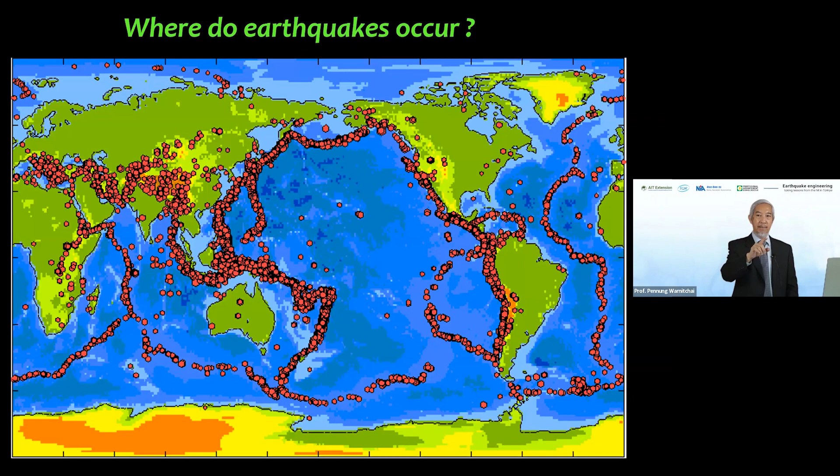So by this mechanism, most earthquakes happen near to or at the boundary. If you look at this slide and go back to the previous one, you can see that most of the earthquakes happen at the boundary or near to the boundary.

Now we come back to the tectonic plate map again. Let's zoom in on a particular area. For example, in Thailand, the picture on the left shows the tectonic map. You can see Thailand, Malaysia, Myanmar, Laos, China are all located in one plate, and India is on the other plate. The plate of India is moving toward our plate at a speed of around 65 millimeters per year. The rate of movement is very slow; if you watch them move, you cannot see that they are moving, but they are moving. The boundary between them is partly in the Andaman Sea, under the Andaman Sea. On the right-hand side, you can see the distribution of earthquakes, concentrated along this boundary between these two plates.

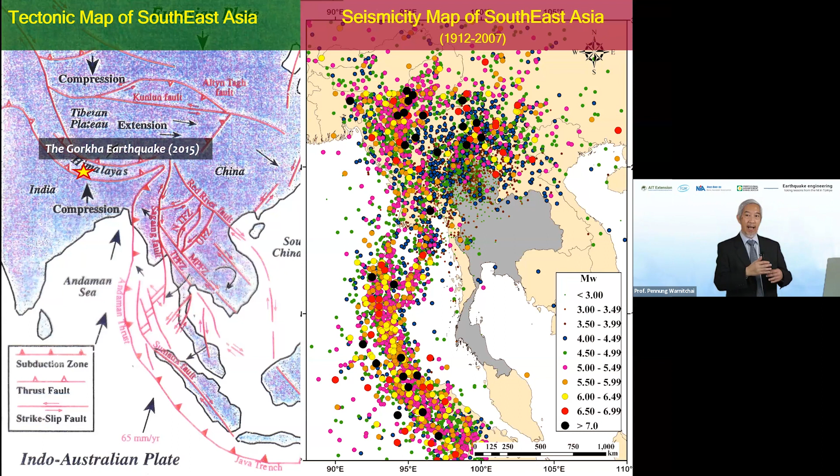The boundary between these two plates also continues to the north. You can see the Himalaya mountain range; actually the Himalaya mountains are also created by tectonic action. Recently in Nepal, a large earthquake happened, called the Gorkha earthquake in 2015. This also happened at the boundary between these two plates. Now let's move to another area.

This is Turkey, some people call it Türkiye, but let me call it Turkey. This country is located in a very complex tectonic condition. We have a Eurasian plate in the north, Anatolian plate, and we have Arabian plate in the south. And these plates are moving in different directions.

The boundary between the Eurasian and Anatolian plate is an active fault called the North Anatolian Fault. That fault shows the boundary between these two big plates, with a relative movement between them at a rate of around 18 millimeters per year. The higher the rate, the more earthquake activity.

The boundary between the Anatolian plate and Arabian plate is the East Anatolian fault, with a rate of movement around 8 millimeters per year. So these are two very large active faults in this zone. You can expect that there will be many earthquakes happening close to this fault or on this fault.

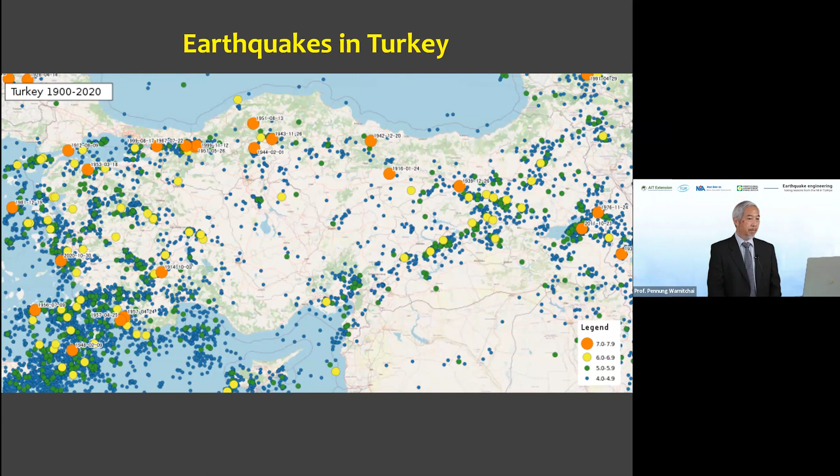You can see in the north, the zone along the North Anatolian Fault, very high. And in the south, you have the East Anatolian Fault. So these are the zones that they already expect large ground shaking intensity. They already expect damaging earthquakes to happen along this zone.

And then this year, February 2023, they had a big earthquake, the Turkey-Syria earthquake. The location is along a portion of the East Anatolian Fault. If you go back to the previous slide, it is actually this area, the area that they already expected this to happen.

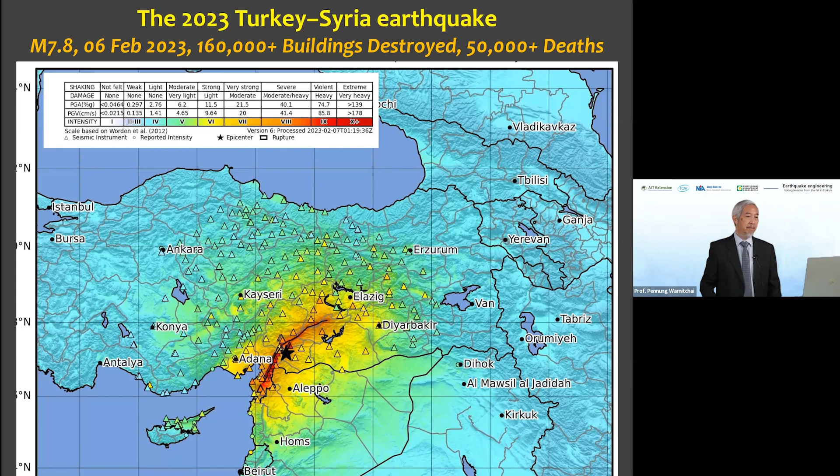Let me show you some video clips in the same area. A single large earthquake.

Now, this earthquake came without warning. We cannot give an early warning for earthquake type disasters. We cannot predict when it will happen, where it will happen. We cannot predict it. So the best strategy to handle this risk, to mitigate the risk, is to make sure that our buildings are strong enough to stand against earthquakes.

To do that, we need to design and construct our buildings for earthquake resistance. But there are many explanations why we see a large number of damaged buildings and a large number of casualties. The first explanation is that a large number of buildings were built before modern earthquake-resistant building design standards were introduced in Turkey. That's one of the explanations we have.

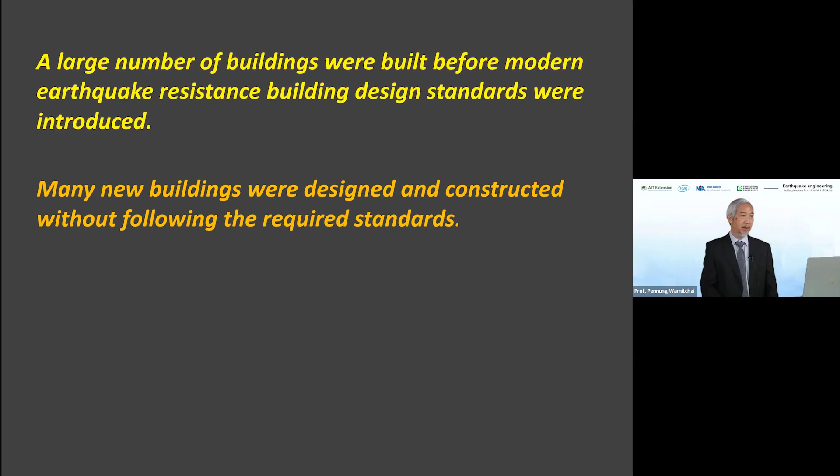And the third one, I think, is also quite important. The intensity of ground shaking was higher, much higher than the level expected in the standard. In the standard, we assume some level of maximum ground shaking. But for this case, the ground shaking turned out to be stronger than what was assumed in the standard.

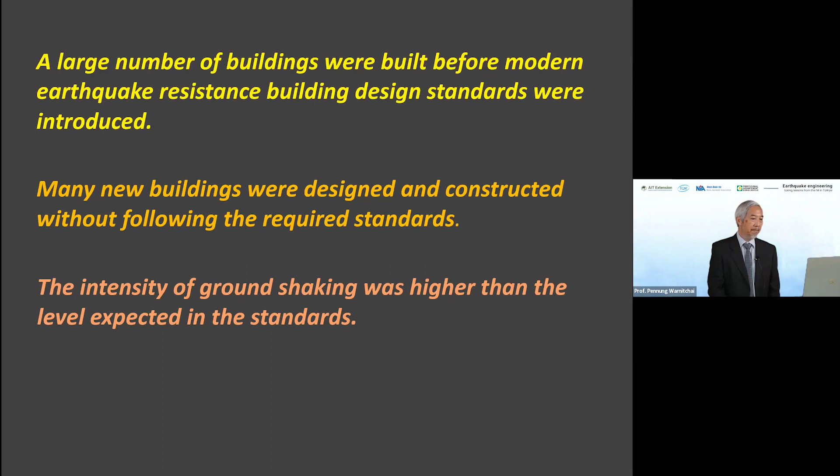Let me show you some information. This is a bit technical, but I hope you will understand. The pictures below show the location of seismic instruments in the area affected by this earthquake, and they have recorded many ground motions. They have many ground acceleration records available from all these seismic instruments, and they use that to calculate what will be the maximum earthquake-induced force in the building.

This is a lateral force produced by the earthquake in the building, shown in the upper figure. The vertical axis shows the level of maximum earthquake-induced force, but this force depends on many properties of the building. The key property is the natural period of the building, so this plots the force against the natural period of the building.

Let me give you some rough idea. 0.5 means 0.5 second natural period, related to a building of about 5 stories. 1.0 second means a building of about 10 stories, and I think you can continue from there.

Now, the standard is given by 3 curves, the red, the blue, the green, for different soil conditions. All these curves show the level of earthquake-induced force in the building expected in the standard, based on the 500-year earthquake that may happen only once in 500 years. But the ground motions we recorded, when we compute the level of earthquake-induced force, many of them are much higher than the standard design curve. You can see many of them exceed this level.

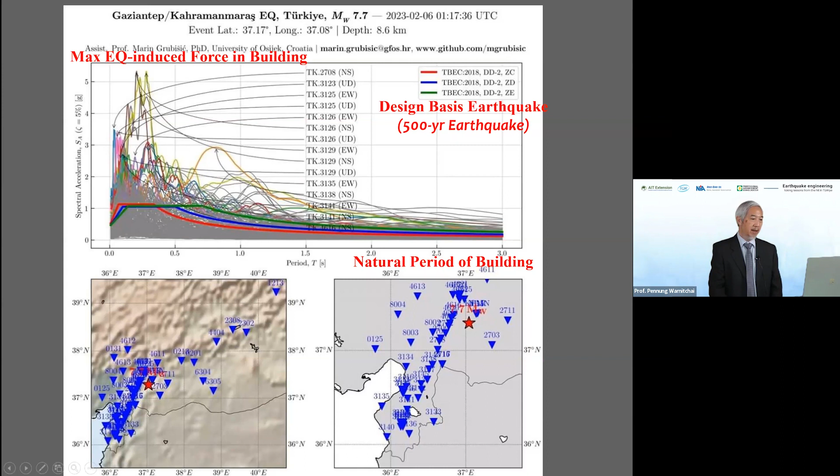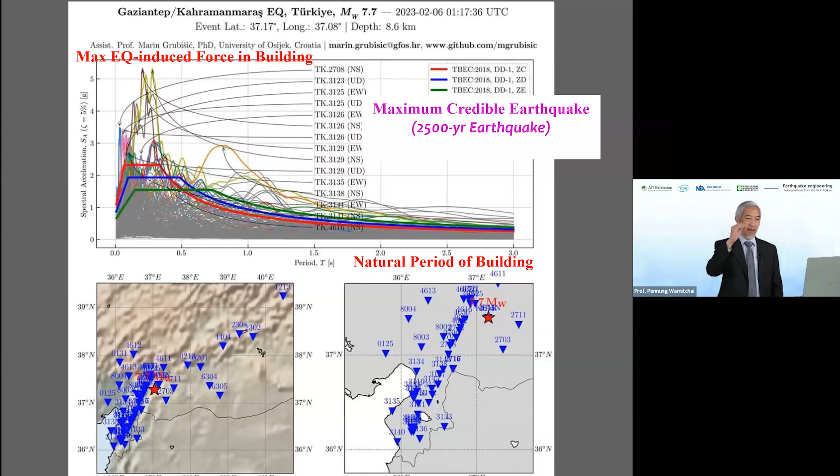So we have 3 issues. We have old buildings that are not following the new standard, and new buildings that also are not following the standard. And also the standard is not based on a level high enough to cover all these cases.

Based on this, we can then know our target. We will know what is the maximum level of ground shaking that might occur in our country, and then you can prepare yourself for that level.

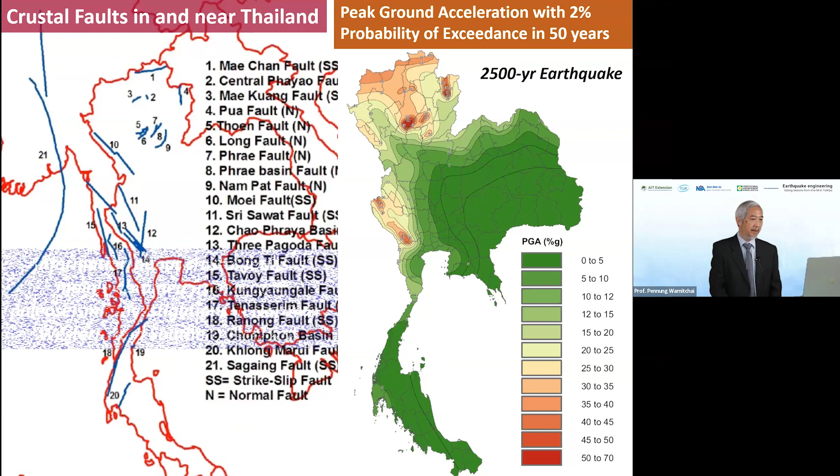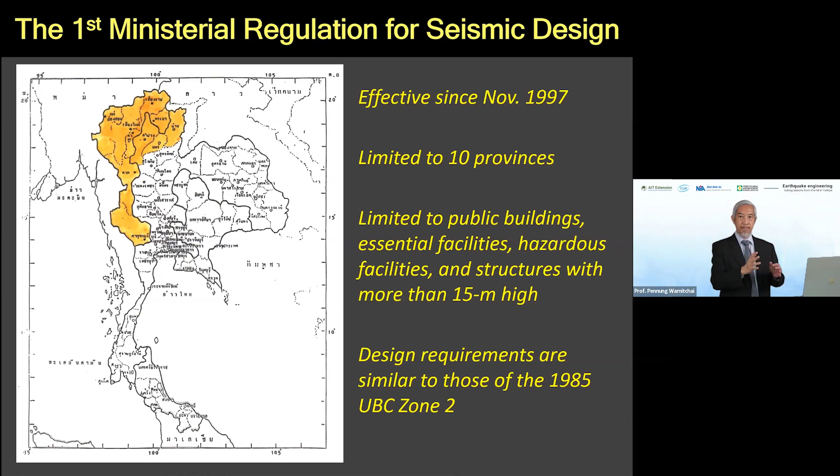And after that, around 10 years later, we introduced the guideline, or design standard. We need to have a regulation to make sure that people will follow and design buildings for earthquakes, and we need to have a standard for engineers and architects to make a proper design and construction of buildings and structures. So for the case of Thailand, we introduced the regulation first, and then followed with the national standard to guide engineers in designing buildings against earthquakes.

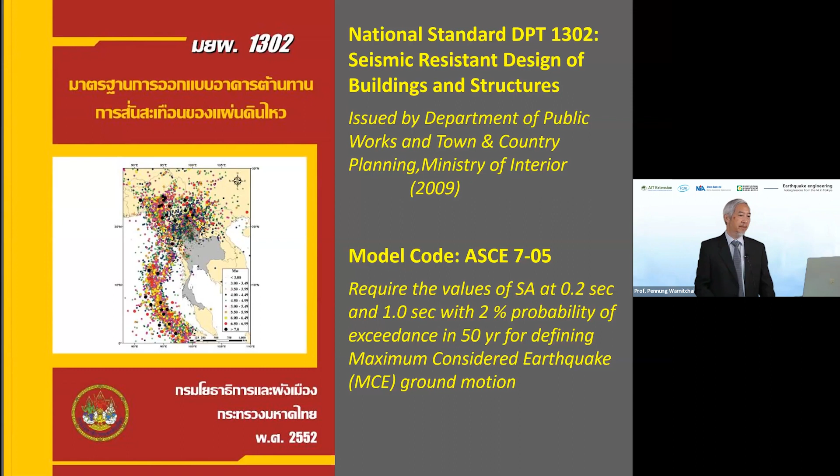Now, after talking a lot about the need for earthquake resistant design, let me give you some rough idea of what engineers need to do to make sure buildings can stand against earthquakes. First, we need to make sure it has some lateral strength. Lateral strength means ability to stand against lateral force.

When an earthquake shakes your building, it produces additional force, both in the vertical direction and also the lateral direction. Your building already has some ability to carry vertical load, because most buildings are designed for gravity load, dead load, and live load, so it has some additional strength for additional vertical load. But most buildings normally are not designed for lateral effect.

So we need to have some lateral strength. In the code, in the standard, there will be several formulas and detailed guides on how to design this.

The second point is we need to make sure the building has some lateral deformability. Some people call this ductility. It means that under the effect of an earthquake, the building will sway left and right in a cyclic manner. This may create damage to some components, columns, beams. We have to make sure that after several cyclic responses, the building will be able to stand and continue to carry the gravity load.

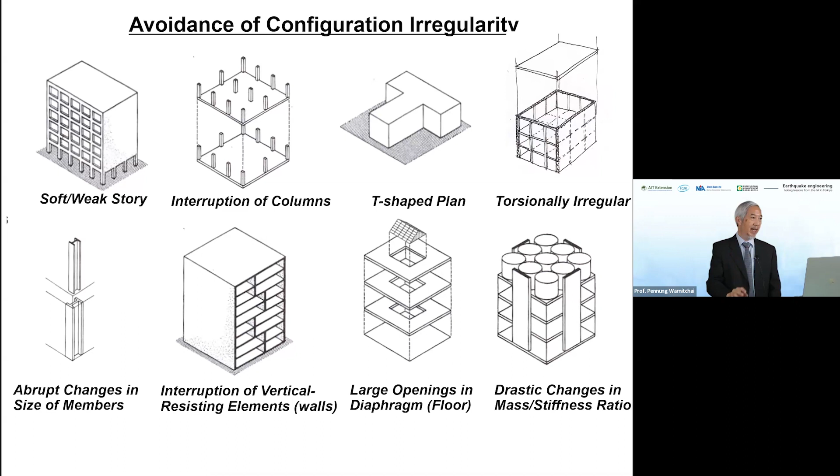Nowadays, many modern constructions - our houses, offices, buildings - use concrete material. Concrete is a strong material, but it's quite brittle, it cannot deform well. So we normally put steel bar inside the concrete, making it a reinforced concrete structure - concrete with steel reinforcement inside. But whether it will deform well or not depends on how you arrange the steel reinforcement inside your concrete structure.

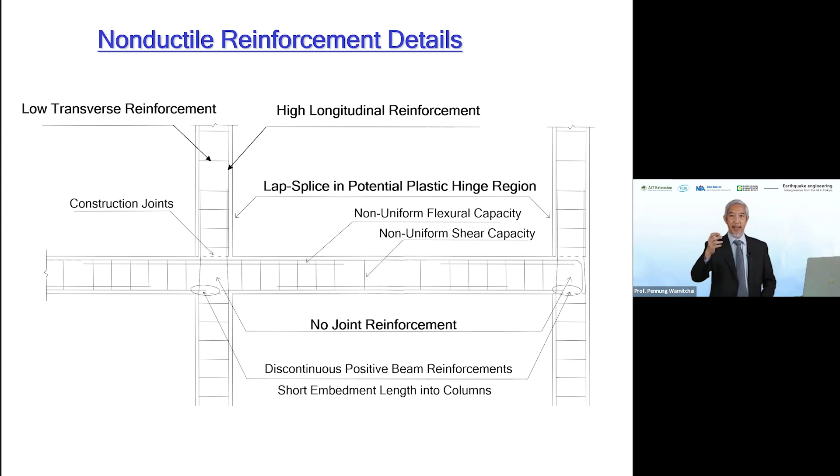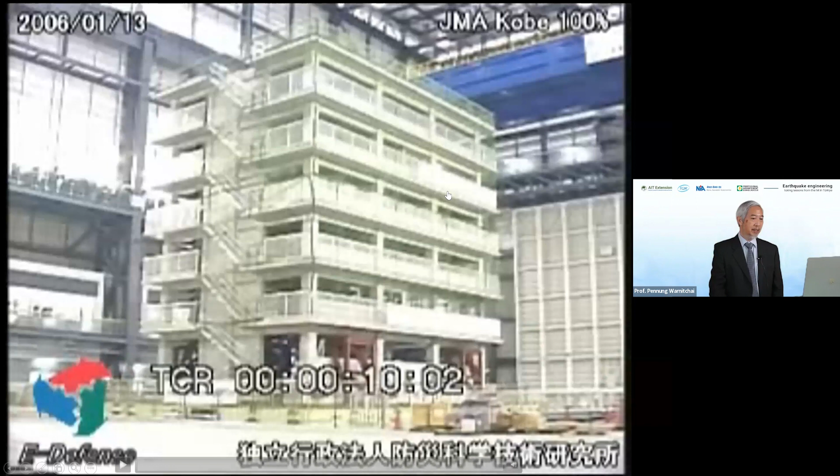I can show you some examples. This is an experiment conducted in Japan - a full-scale building put on a large shaking table. Japan actually invests a lot in earthquake research, so we can learn from that.

I'm freezing the video now. You don't have to be an engineer - you can tell that this column cannot carry any more load. It's completely destroyed by a brittle type of failure we call shear failure. So it cannot carry any more gravity load, the gravity load that transfers from the top floor down to this floor.

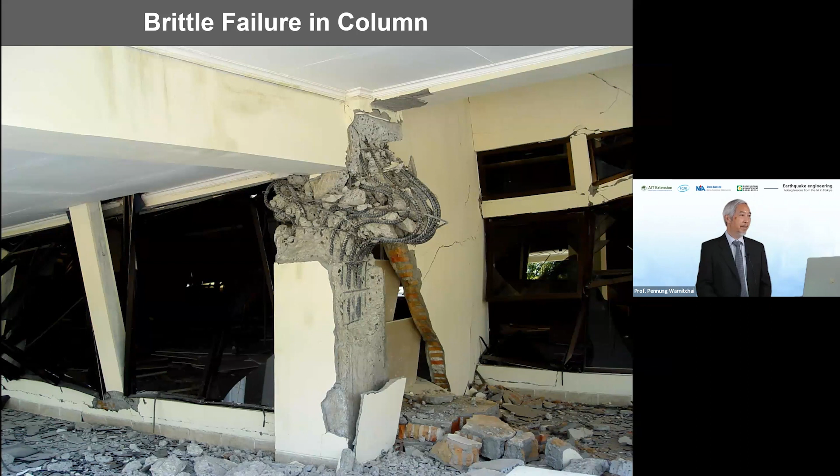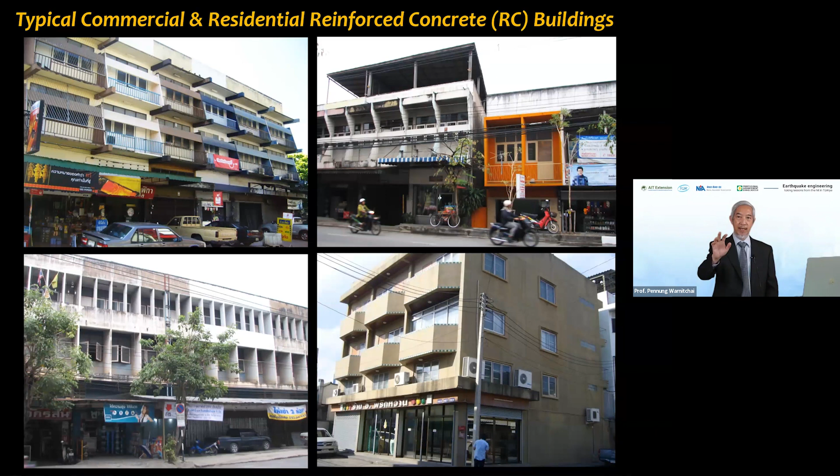Now that you know something about earthquake resistant design, let me give you an example of a real building. This is a typical commercial residential building - we have a lot of these buildings in Thailand, and I think you have them in Nepal, Singapore, and many other countries. They actually have many features that make them vulnerable to earthquake shaking. Most of these buildings are not designed for earthquake. The first story is for business and commercial purposes, the upper stories are for residential purposes. So if you take one sample of this building, you will see the structure like this.

The white part shows columns and beams forming a frame. The orange panel is the wall, made from brick. The brick wall is not a structural component, but it can strengthen and stiffen the structure.

We normally have many partition walls, exterior and interior, on the upper stories because they're for residential purposes. But for the first story, you don't have a wall in the front facing the street, though you may have walls on the side and back.

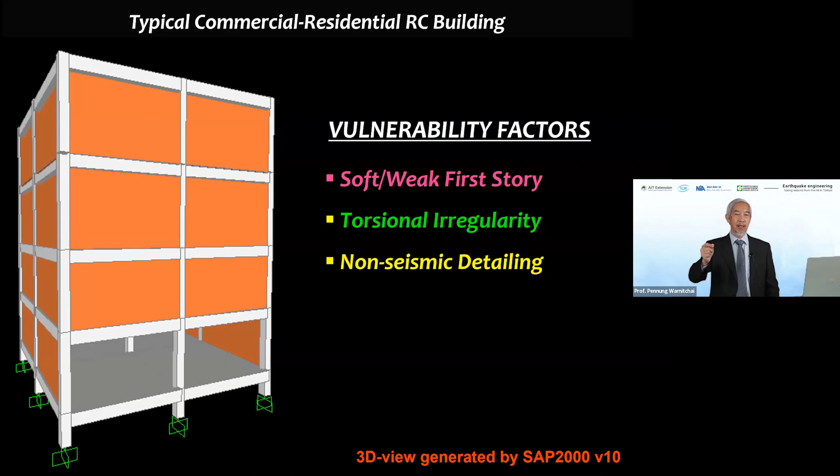This makes the first story relatively weaker and softer compared to the upper story, so we have a soft and weak story. The arrangement of walls—none in front but walls on the other three sides—makes it torsionally irregular. We also don't put reinforcement in the columns and beams in the right way, so it's not ductile. It's non-seismic detailing.

So when subject to earthquake, the building will deform like this. The upper floor looks quite rigid because of the many partition walls strengthening it, but the deformation concentrates only in the first story. Actually, it concentrates in the front row of the building, because we have walls in the back and on the sides.

So in the whole structure, the only critical components are the first story columns in the front row. All the deformation concentrates in these columns. So you can expect, when subject to earthquake, which component will fail first? It will be the first story column in the front row.

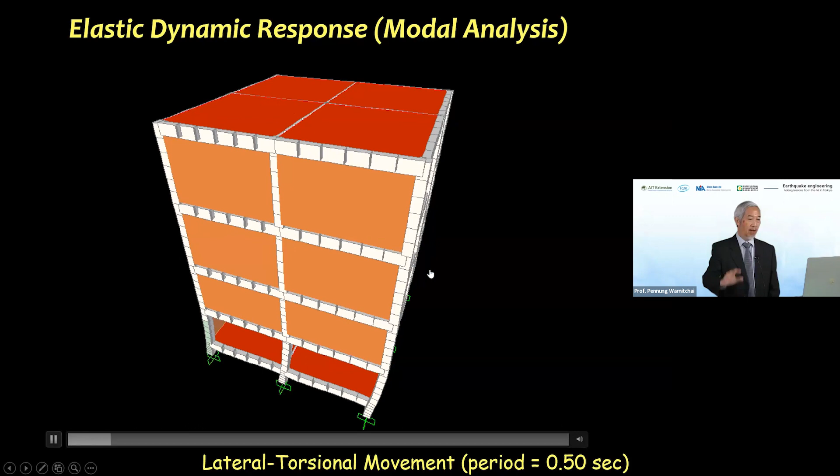The earthquake happened in the nighttime. Those who survived are those who slept on the upper floor. So please do not sleep on the first floor if you are inside this type of building.

This is a second example, from Nepal, Sitapila area in Kathmandu. I took this when I visited the area after the Gorkha earthquake. What you see here is the second story—the first story already collapsed.

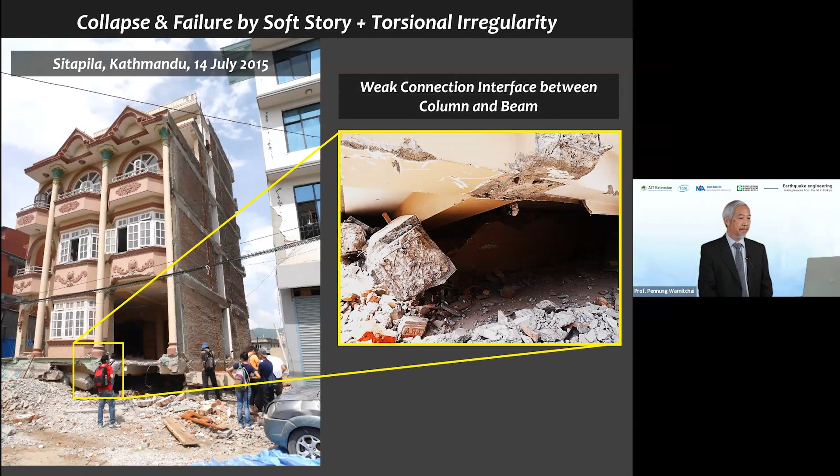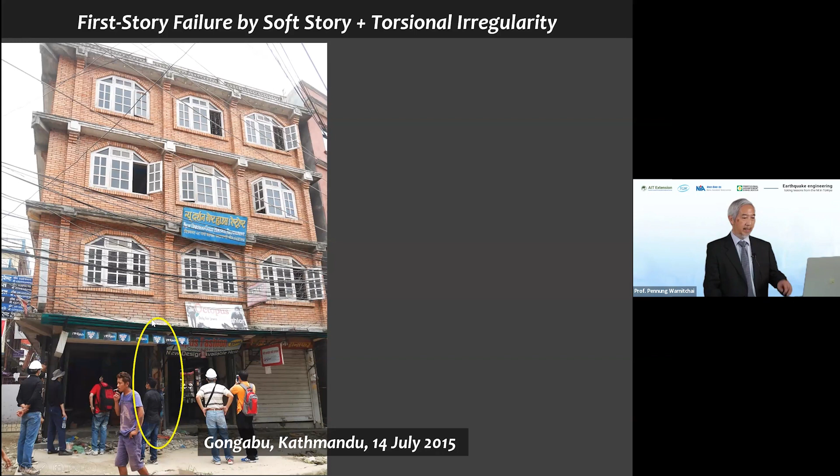Here is another example: a 4-story commercial residential building. The upper floor looks okay, the window is still in good condition, not much damage. But if you take a look at this particular column in the first story, you can see that it is completely in bad shape—already crushed, broken down. I still don't understand why it's still standing, but maybe the load is carried by the brick wall.

The structure is quite vulnerable, quite dangerous. And you can look inside the building—the first story shows very severe damage from this effect.

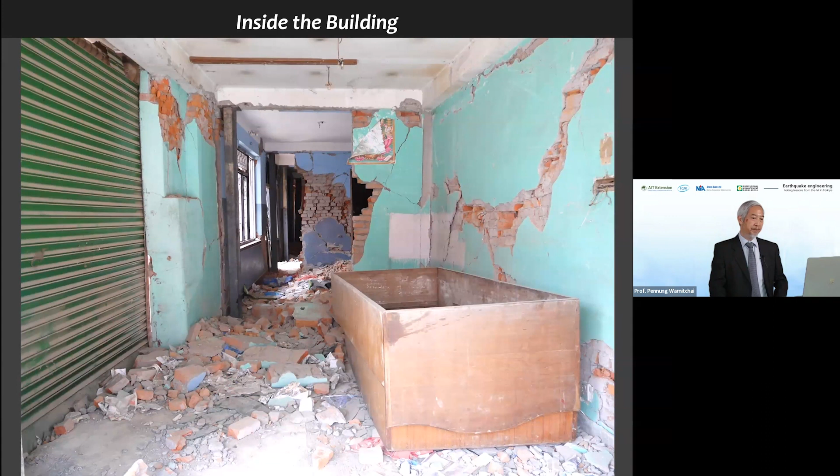I went to many places and took many pictures. I can say that the majority of damage concentrates in the first story, so you can see the damage in many buildings initiates from the collapse of the first story.

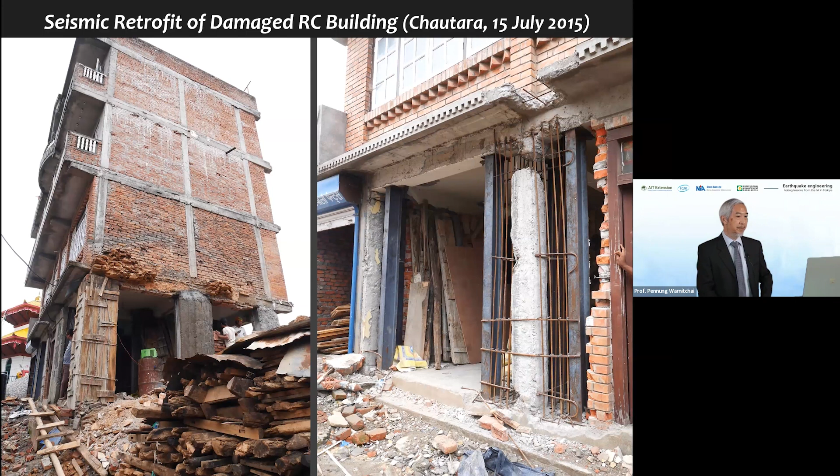When I looked at this, I thought it was a good idea—quite practical. So I brought back the drawing of a typical commercial residential building in Nepal and gave it to one of my students, who is from Nepal. I asked him to find a way to improve this building so it would be able to stand against any kind of earthquake we expect in Nepal.

So he constructed a mathematical model, a computer model of this building. He tested and checked many possible methods.

I also asked him not to try the difficult way, but to use a method that contractors in Nepal can handle. I asked him not to do too much, because if you do too much, it becomes expensive.

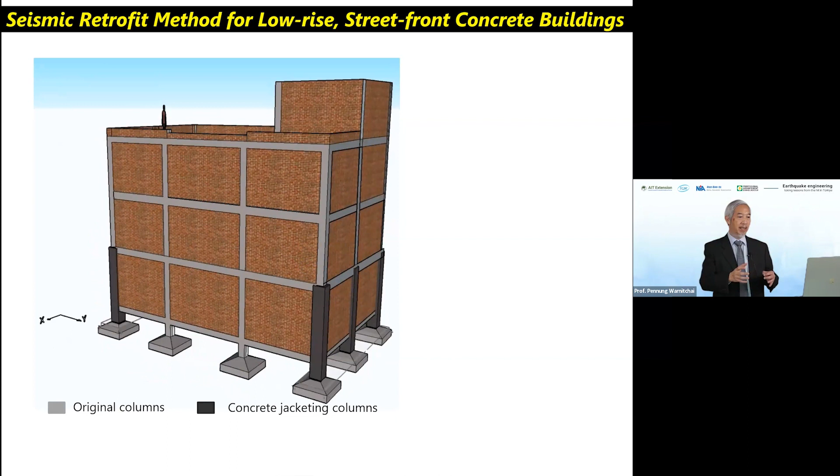So he found that the best way to improve the seismic performance of this building is to do column jacketing, casting a new column around the existing one. The existing column is small, and we make it larger.

He found that if we do it only for the front, the column in the back will fail. So if we do column jacketing in both the front and the back, the whole structure will be okay. It is possible to improve the seismic capacity of an existing building this way.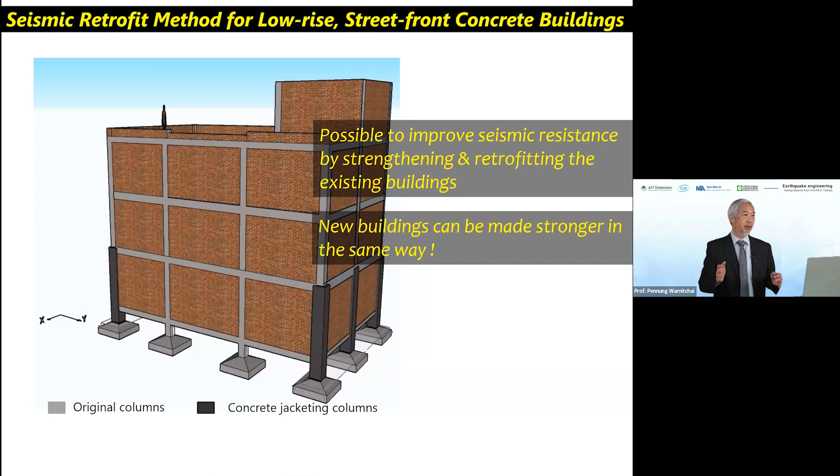If you are building in the future, you can design it this way from the start, with a large column in the first story, without needing to enlarge it later or extend it to the second or third story. So the change in cost may not be so high, the extra money required is not much, but you get a safer building to live and stay in.

Now, if you look at many other textbooks, they give many other ways to improve the seismic performance. The way we just discussed increases the strength of the frame.

But there are many other ways. Instead of using a solid brick wall, you can change it into a softer wall, like a gypsum board or other material. This will not create a soft story effect, and it will not create a torsional irregularity effect.

Or you can put a wall in the front a little bit to prevent torsional effect. Or you don't do much structurally, just allow the structure to deform, but make sure the column is ductile and more deformable. So there are many possible ways to improve seismic performance.

But normally people will not do it because they do not think their buildings are vulnerable. If they are not aware of the risk, I don't think they will do anything.

This is a test in the lab that we conduct at AIT. We put the column into the testing frame and wrap the base of the column with carbon fiber sheet, which we call carbon fiber reinforced polymer. We wrap it around the column.

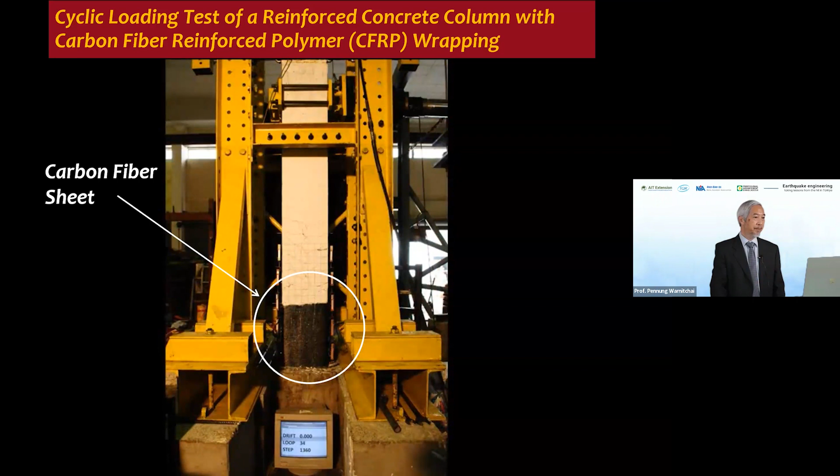So you can compare the column without wrapping versus the one with carbon fiber wrapping. This small modification can change the behavior of the structure.

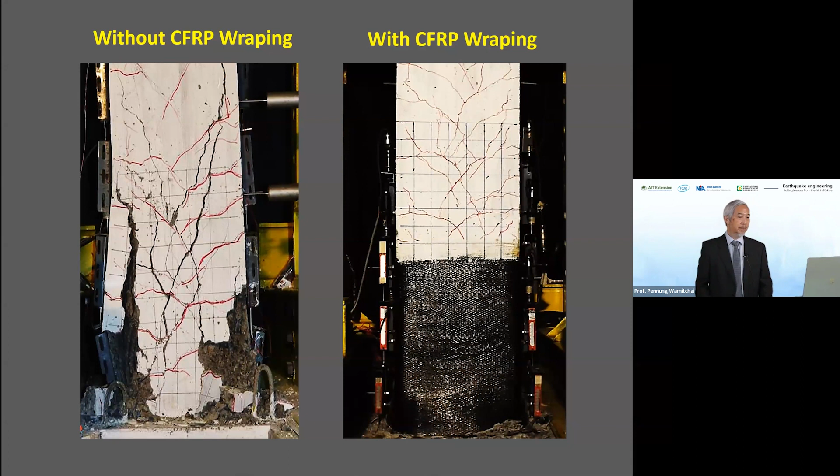Now I want to highlight another type of building that is quite common in many countries in Asia, called brick building. There's no concrete, no reinforcement steel, just brick. The technical term is unreinforced masonry building. Here's a picture of one in Nepal.

You can see it's nearly collapsed. A large number of existing buildings in Asia, in China, India, Indonesia, and many earthquake-prone countries are built this way. They are quite vulnerable to earthquake ground shaking, much more vulnerable when compared with reinforced concrete frame buildings.

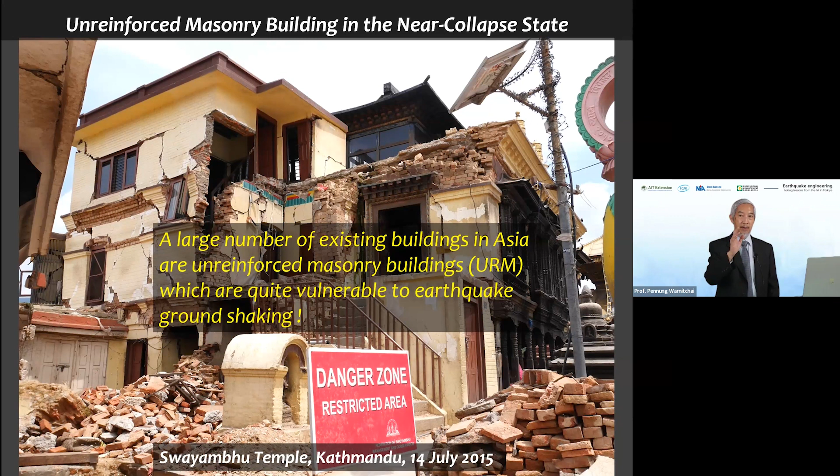Here's an example, in the ancient city near Kathmandu called Bhaktapur in Nepal. Before the earthquake, there were many brick buildings in this area, but they all collapsed into this debris. You can see in the back the reinforced concrete frame building standing well, showing the relative weakness between the brick building and the normal reinforced concrete frame building.

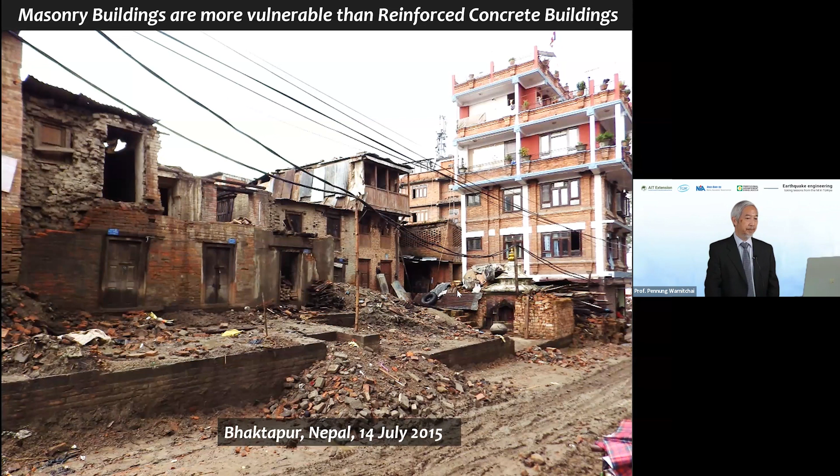The brick building collapsed into two pieces. I have many photos showing this, where the frame stands well but the brick building around it collapsed into debris.

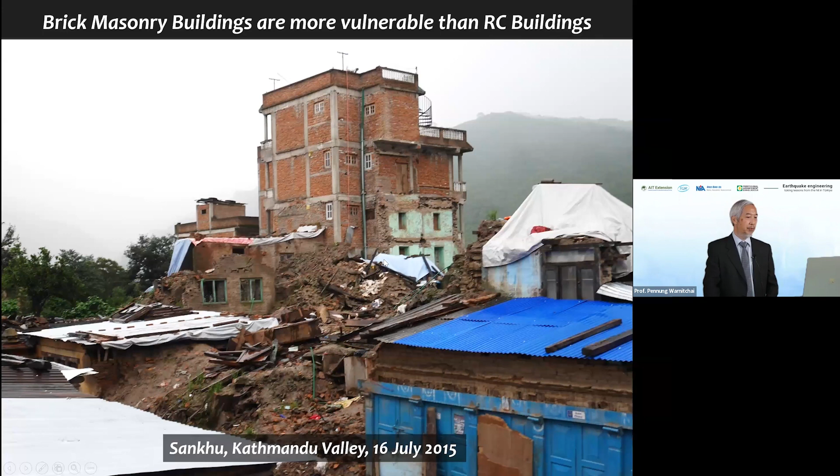So what to do with this? If you have many weak, unreinforced masonry buildings and want to reduce the risk, the solution is straightforward: you need to replace them with stronger buildings.

There are many possible ways to make stronger construction. One is to put reinforcement into this masonry building, or you can use a technique called confined masonry structure. But personally, I think the best way is to change them into reinforced concrete buildings, because in many towns and cities, people are quite familiar with reinforced concrete construction. We just need to build more reinforced concrete buildings instead of continuing with masonry building.

Let's see the video on the left. There are two buildings. On the left side, the building has been strengthened or retrofit to make it a bit stronger. And on the right, you have a typical wood frame building.

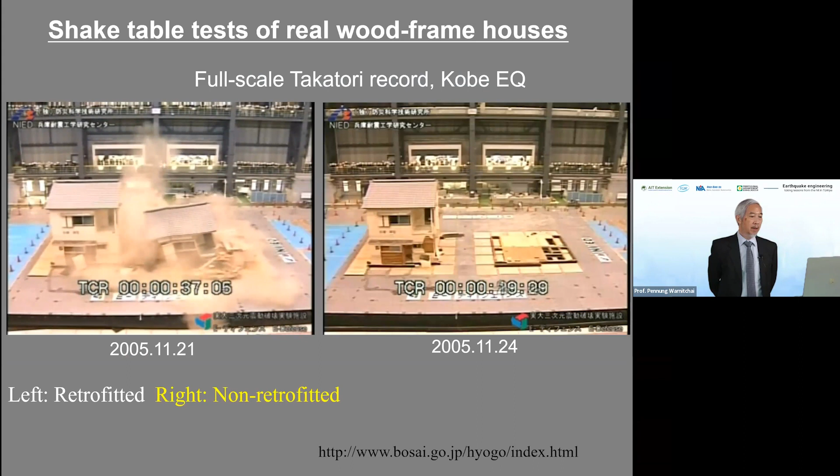Again, by the collapse, by the damage in the first story. And the one with seismic retrofit or some strengthening is still standing. So this is the difference between death and life - you will live or die depending on this.

After this test, after a few days, they remove the collapsed building and they apply the same level of ground shaking again.

Against one earthquake. But after the first earthquake, it was damaged. The ability to stand against the next earthquake reduced. I think that is why in many earthquake events, after the first main shock, many people were afraid to go back to their home to live in their house. Actually, that is quite reasonable. Your house needs to be inspected by an engineer first to make sure that the building is still in good condition, still has the ability to stand against the next earthquake, because you may have aftershocks happening again, or another earthquake event shaking your building.

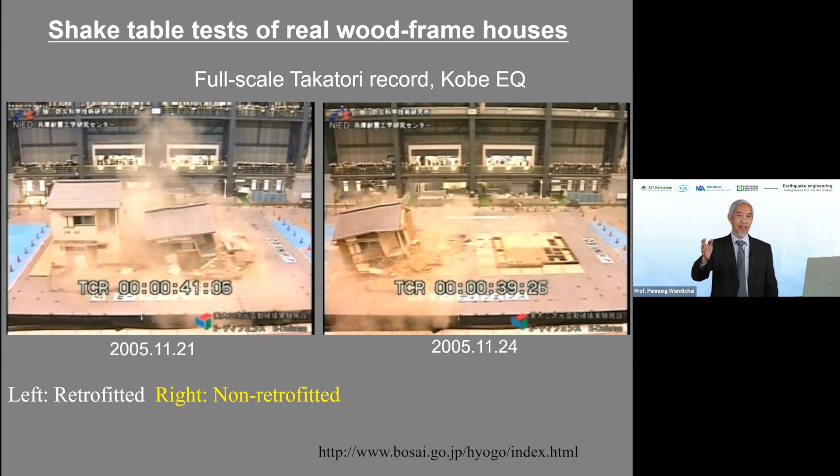Now, I have been talking a lot about the damage to buildings and structures, but sometimes your building may continue to stand, but the earthquake shaking may have a big impact on the content inside the building. Now you can see the computer facility, furniture thrown by the effect of floor acceleration. For some types of buildings, the content inside needs to be protected as well, like hospitals or some computer facilities. You need to control, reduce the impact to the content inside as well.

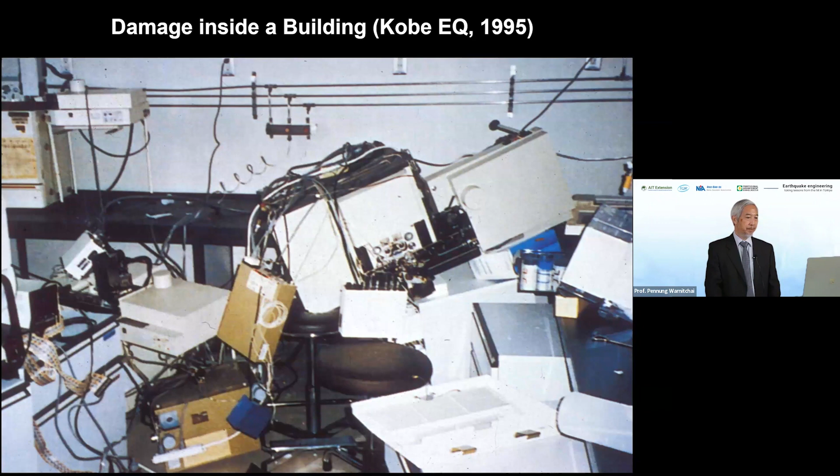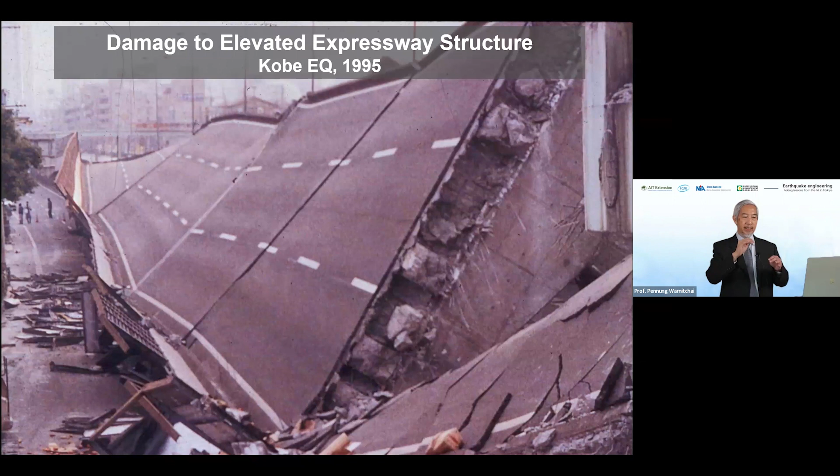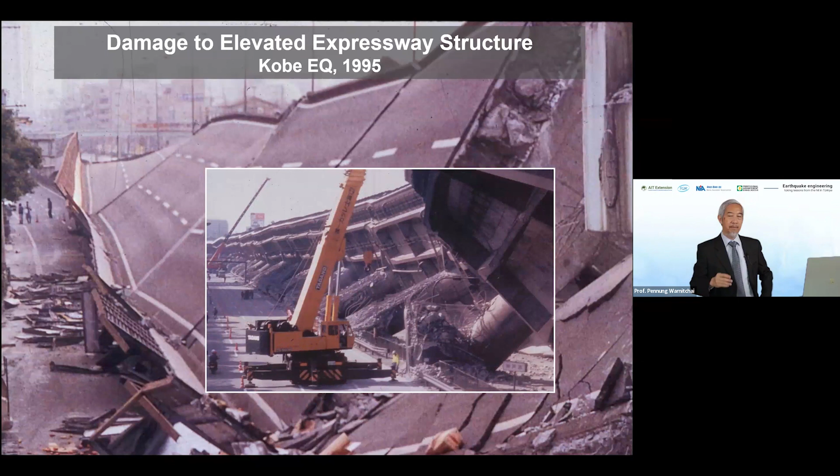I'll show you another type of damage. This is damage not to a building, but to a transportation structure, an expressway. This is in Japan. They have a column supporting this elevated expressway, and the column was destroyed by the effect of ground shaking.

Here is a road bridge in the Philippines. There are many possible mechanisms that will lead to the collapse of a road bridge. The piers may collapse, or the bridge girder on top may slide from the support bearing and fall down. There are many possible ways that a road bridge can be destroyed by earthquake.

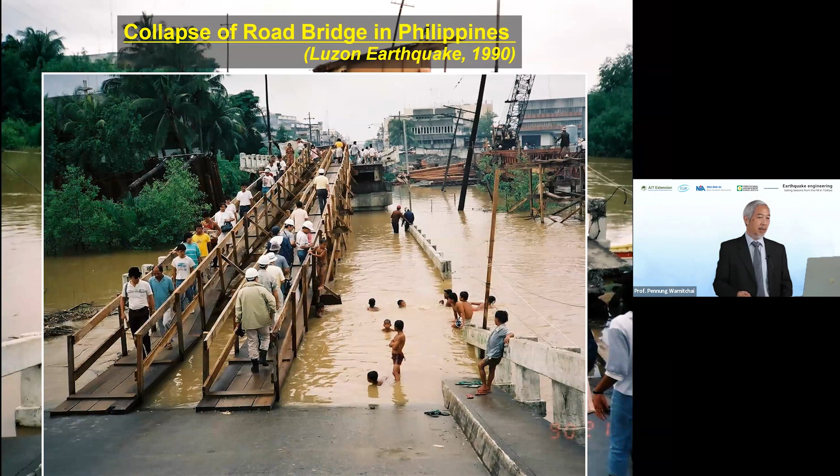For this bridge, after it collapsed, people built a temporary bridge. We actually need a bridge because, especially after the earthquake, we need it for many purposes.

Now, if you are in some area where the soil is sandy type, saturated with groundwater, and subject to strong shaking, your sandy soil may turn into liquid, called liquid sand. This process is called liquefaction. And when your solid soil turns into liquid sand, then the building may overturn or may sink down.

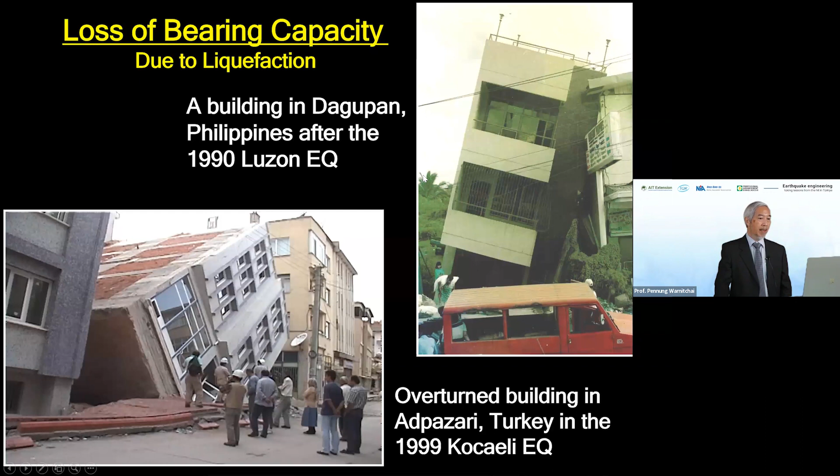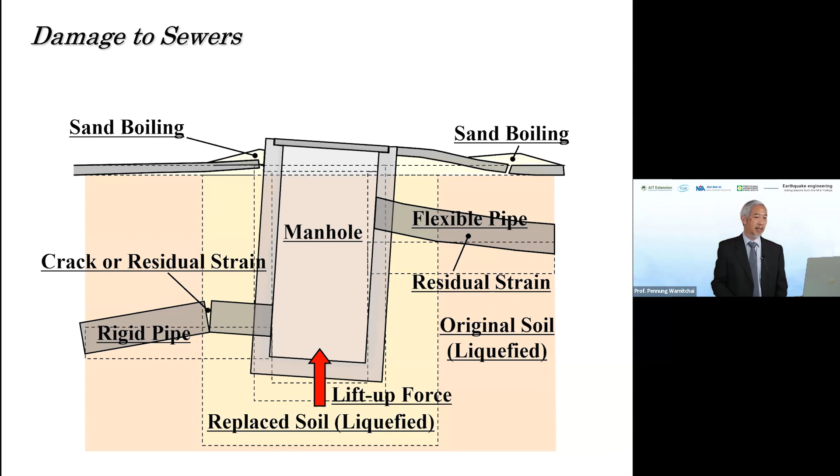When you have soil liquefaction, it will destroy many underground structures. For example, you may have a manhole, you may have a pipe network inside the soil. If the soil is solid, they will stay in their place. But when the soil turns to liquid and the manhole is lighter than the surrounding soil, it will be floated up by the buoyant force. It will create breaking of the pipe and damage to many underground structures.

So this shows you the manhole structure. Initially it stayed underneath the ground, but the soil turned into liquid, so this manhole was floated up, punching through the asphalt layer.

When you have soil liquefaction, it will destroy many piping networks inside. Your water distribution network, gas distribution network, and telecommunication lines can be seriously affected by soil liquefaction.

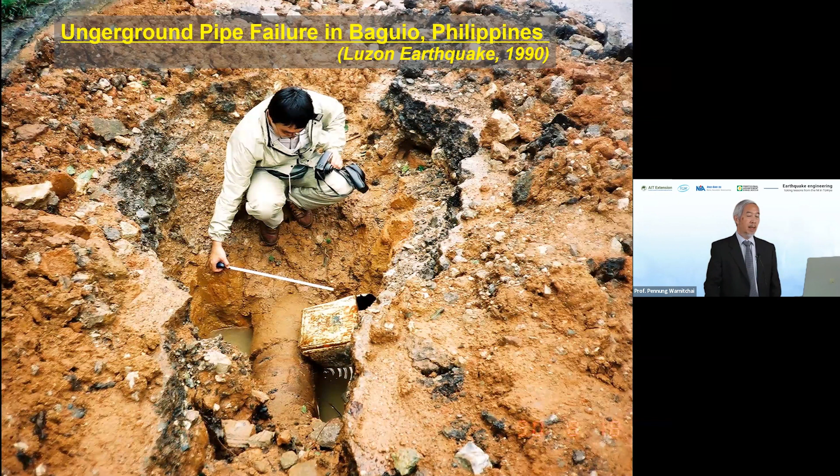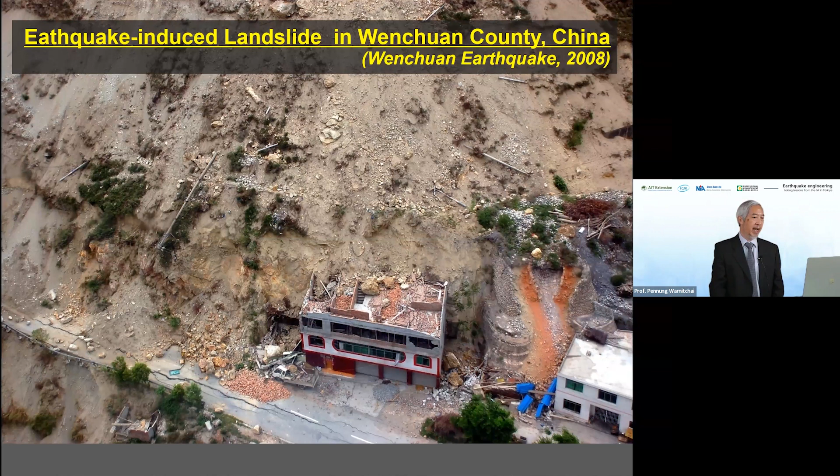When you have an embankment structure, used for irrigation purposes or as a dike, and it's subject to cyclic ground movement, it will create slope failure. When the ground moves one way, one side of the slope fails; when it moves the opposite way, the opposite side fails. After cyclic shaking, the embankment structure will have many cracks and may break, like this example.

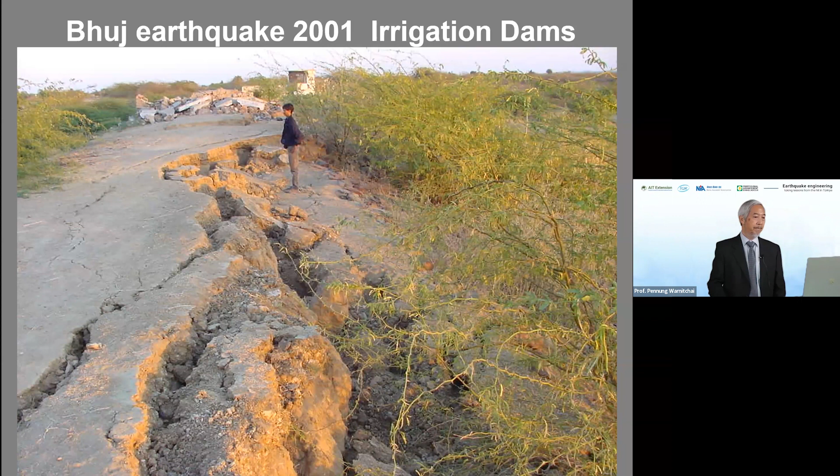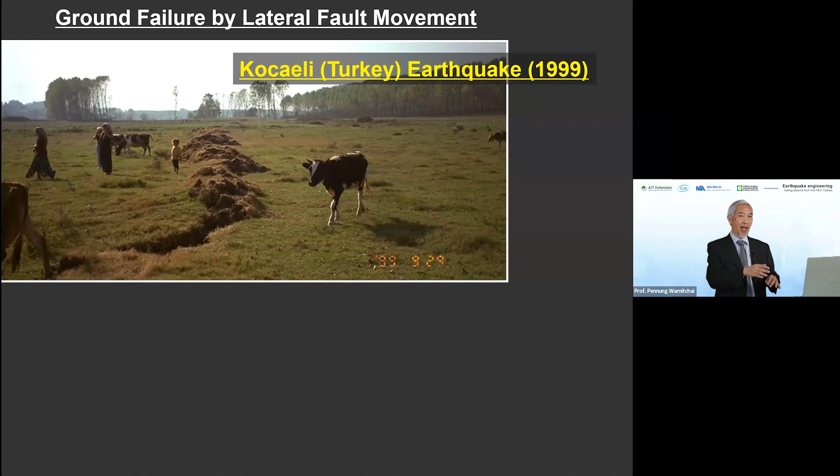If your area has an active fault underneath, and there is a movement of the active fault, it may break the upper soil layer as well, like in Turkey. This guy is standing on top of an active fault, but the ground behind him moved to the right while the ground in front of him moved to the left, so they are separated by several meters. This is horizontal movement along the fault.

If you build any bridge, road, or anything across this, it will be damaged.

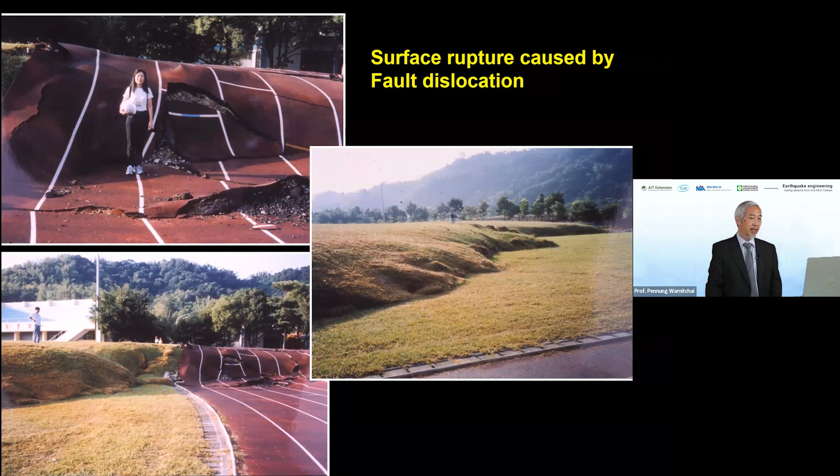It is impossible to design a dam to accommodate this level of displacement. So our strategy as civil engineers is to try to find where the active faults are and avoid building dams across active faults. But sometimes we miss that.

Like this one, they tried, but they missed it. Now they know they have an active fault, after it happened.

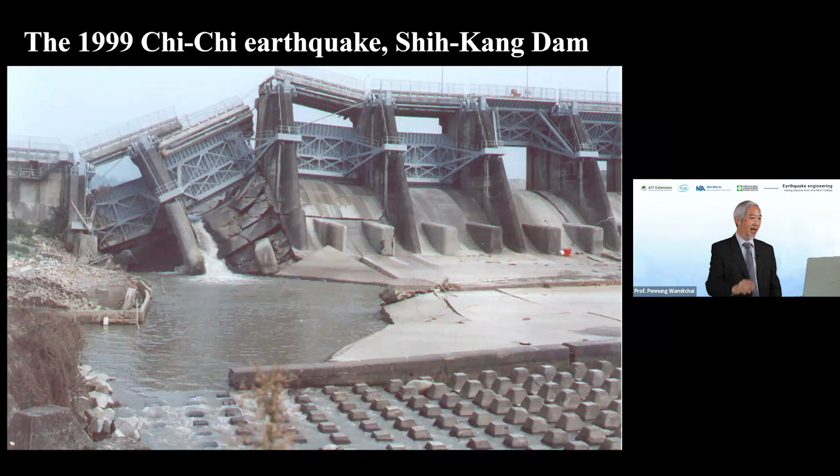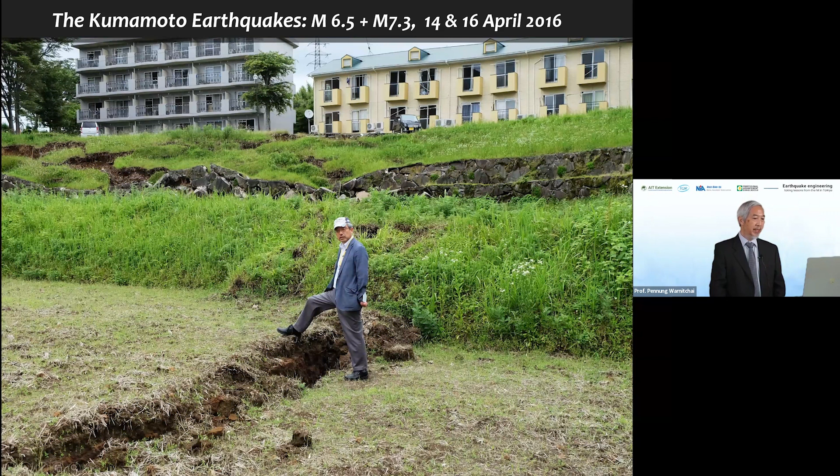This is in Kumamoto. The movement is not large, but you can see the breaking of the surface soil, and the rupture continues to that building, the yellow one. You can see the land around this building is not flat; it's deformed by the surface deformation caused by fault movement, causing damage to the yellow building.

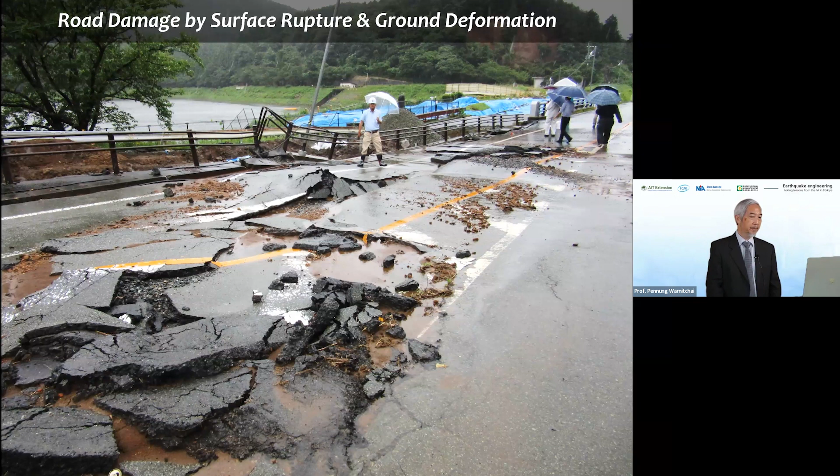Another possible impact is fire. You may have a fire disaster following the earthquake, triggered from damaged buildings. In the case of the Kobe earthquake, fire broke out from 100 different spots in the city after the earthquake, and it continued like this. Because it happened in so many places, it was beyond the Kobe fire department to suppress it, so they just let it continue until it died down by itself.

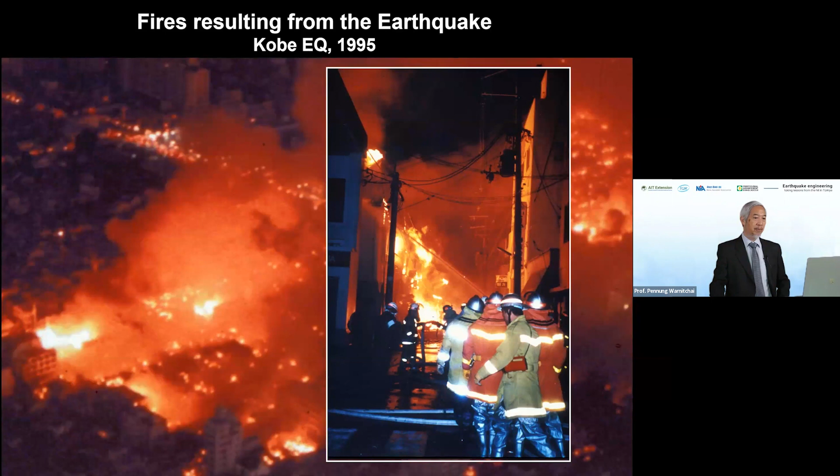This is an example of one earthquake event. You may have everything I explained: building collapse, house collapse, fire following the earthquake, soil liquefaction in some areas, and the collapse of transportation structures and lifeline systems in your city.

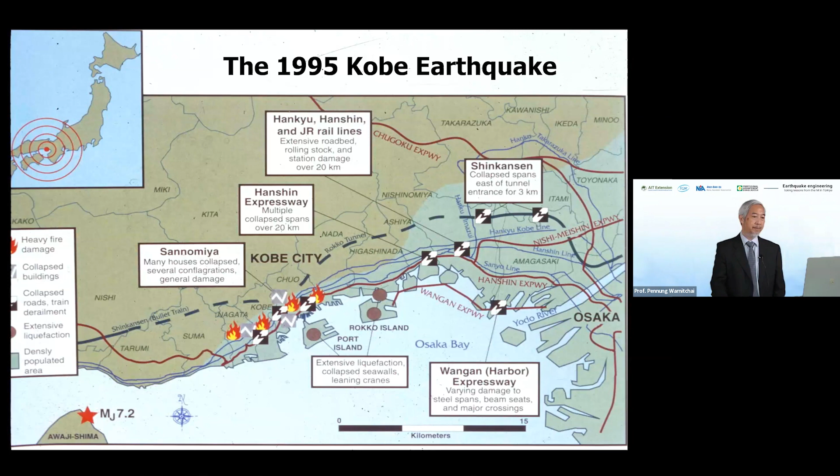When it happens without warning, and you learn about it only when the disaster happens, you cannot do much. But if you are able to estimate or predict this might happen before it happens, if you can calculate or estimate the impact of an earthquake on your city beforehand, I think you can prepare for it, make a plan for it. Today, it is possible to do that.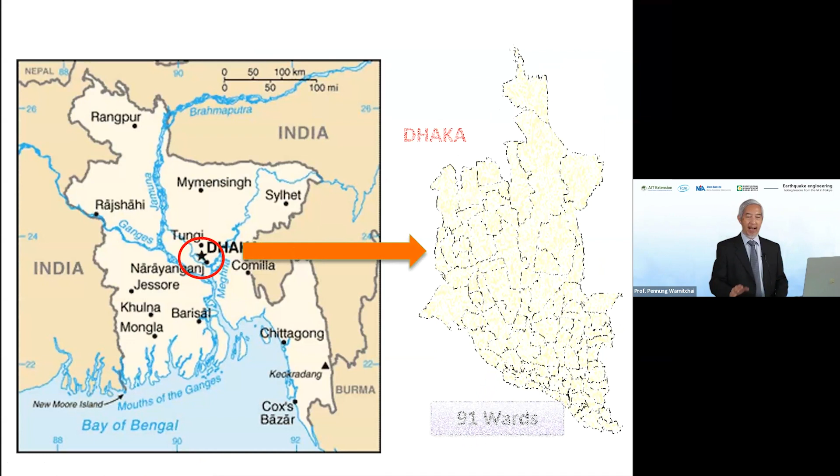Okay, I'm about to finish. I want to show you one example. This is the capital city of Bangladesh, Dhaka city. I use this to demonstrate this idea. The city has 91 wards.

We can actually start from the building information inside the city. This is a building GIS database, geographical information system. And we can create a model of the entire city.

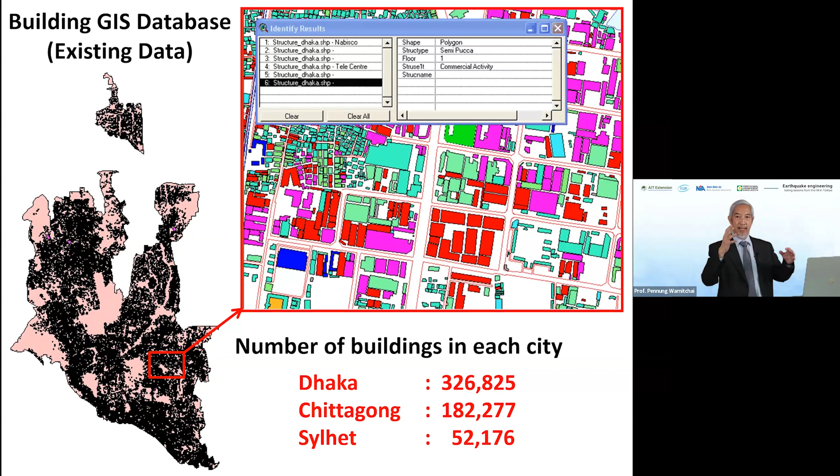We can divide the city into many sub-areas. Like in this case, the city has about 7 million population, we divide into 500 or more sub-areas. And for each sub-area, they have a number of buildings and people in that.

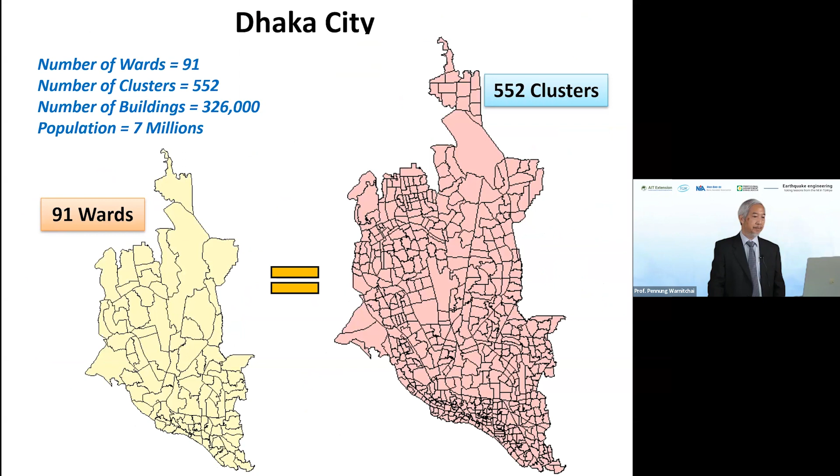And this is the population, nighttime, daytime. We create this model based on many pieces of information we collect on the Dhaka city.

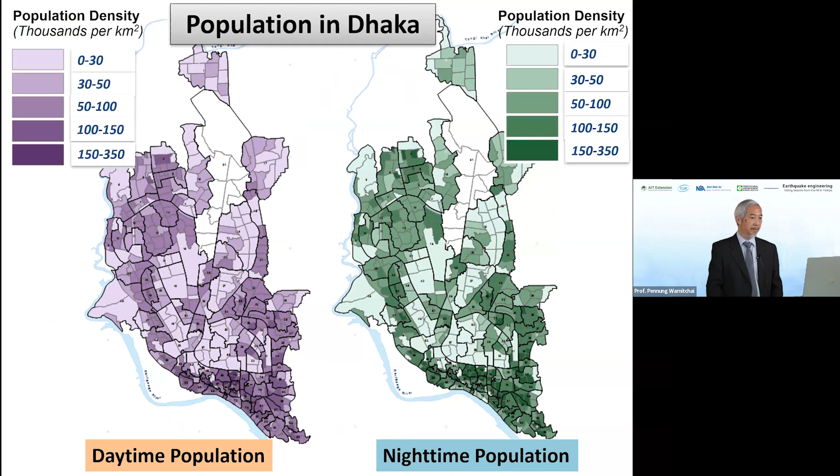This shows you the lifeline and transportation system, like road networks, natural gas distribution network. Of course, we have other details like rail network, water distribution network, and many others, but I don't have time to show all this information.

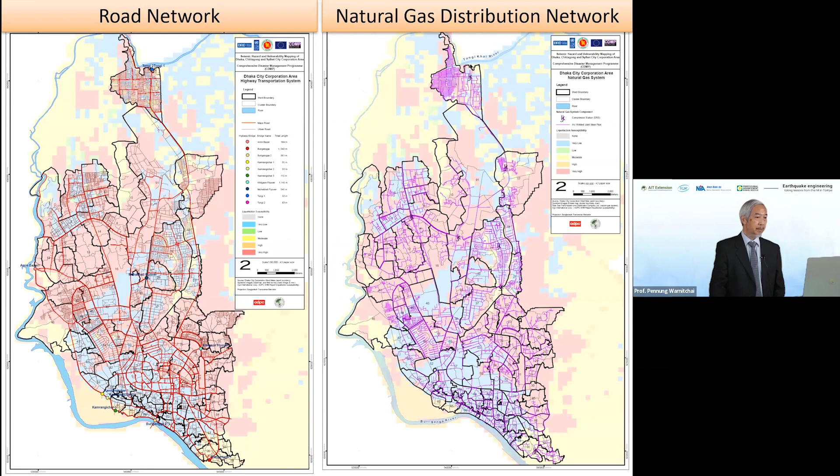And then after we create a model of the city, we can calculate the impact. For example, this is a 500-year earthquake, one scenario. When you have the model, you can calculate the impact of many possible scenarios, maybe 100 or 1,000 scenarios, but this is just one example, one scenario.

We can also calculate the number of casualties. For example, in this case we divided the casualty level into 4 levels. Level 1 is light injury, you don't need to go to hospital. Level 2, you need to go to hospital. Level 3 means not only going to hospital but needing to go to the ICU room, very serious injuries. Level 4 means the person is dead.

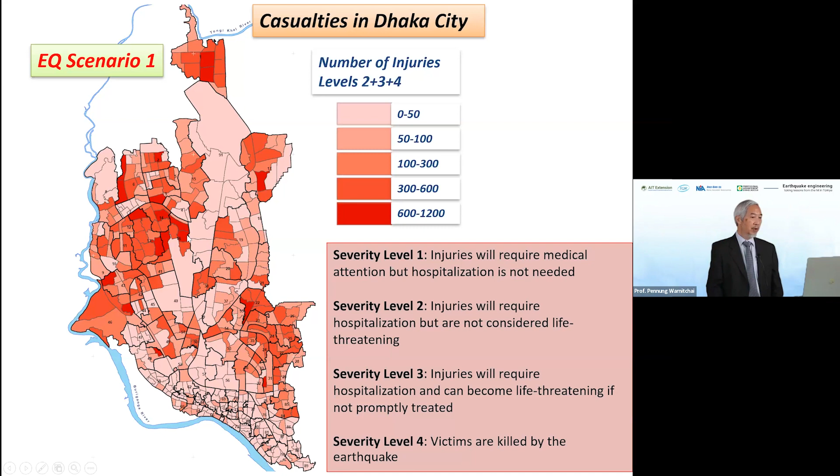So if we sum the serious levels 2, 3, 4, you can create a map like this. So you will understand the need for medical emergency. The demand happened right after the earthquake. You know the location where you can expect a large number of victims.

At the same time, you can calculate the impact to medical care facilities like hospitals or clinics. I use a color code to show that if it's red, your hospital or clinic may not be in good condition, your percent functional is less than 30. But if it's green, your medical facility can still be used for service. So we have red, green, yellow - yellow is somewhere in between. So you can estimate demand and estimate medical supply, and you can plan for medical emergency.

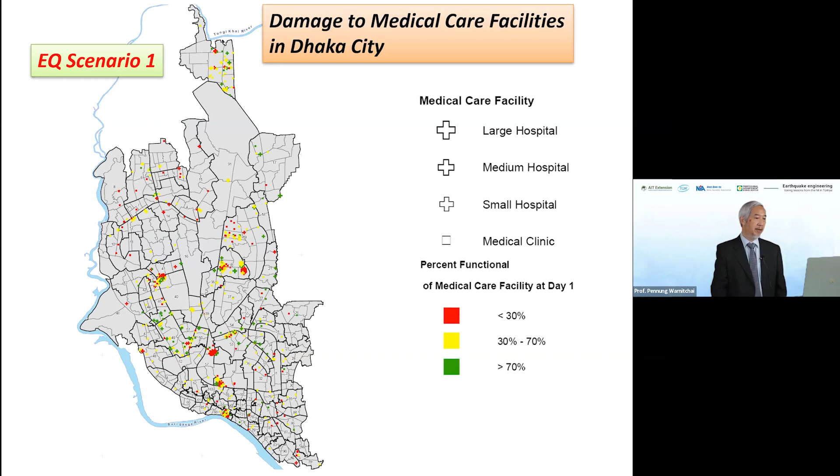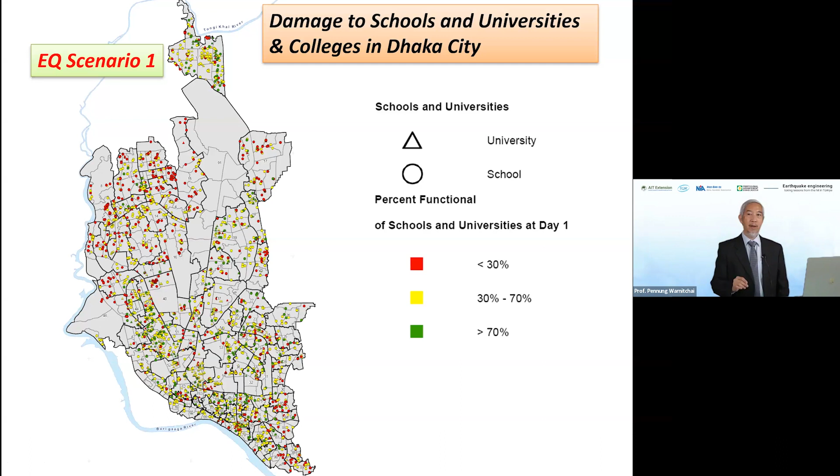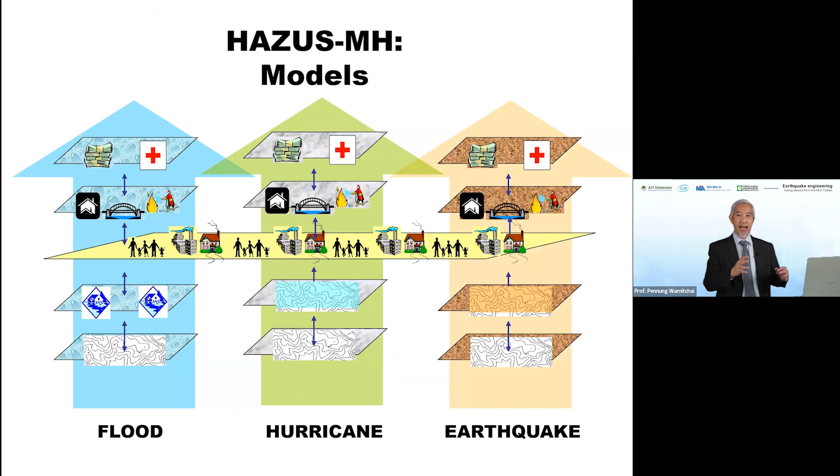Okay, I think I'm going to skip some, but this comes to the last slide. Although I showed you only an example for earthquake, you can do it for other types of disaster - hurricane, windstorm, or flood. So it can be a multi-hazard type of model.

We can use this for many purposes. You can develop emergency response plans, prepare for future disaster, emergency medical service, temporary shelters, emergency water and power, planning for critical transportation outage. You can organize emergency response exercises, or we call them earthquake drills.

You can check many possible plans for mitigating the risk. First, you can identify which elements are at risk, which area will have more building collapse, which area will have more casualties.

Then you can check if you strengthen some buildings, like strengthen school buildings, how many school children you can save, how many lives of them you can save. You can check the effectiveness of this measure. You can see the impact of your building code enforcement. You can use this for future land use planning.

In fact, if you are coming from the insurance industry, I think you know how to use this one - you can calculate the loss and prepare for that. Okay, I think that's all I want to cover. It's about one hour.

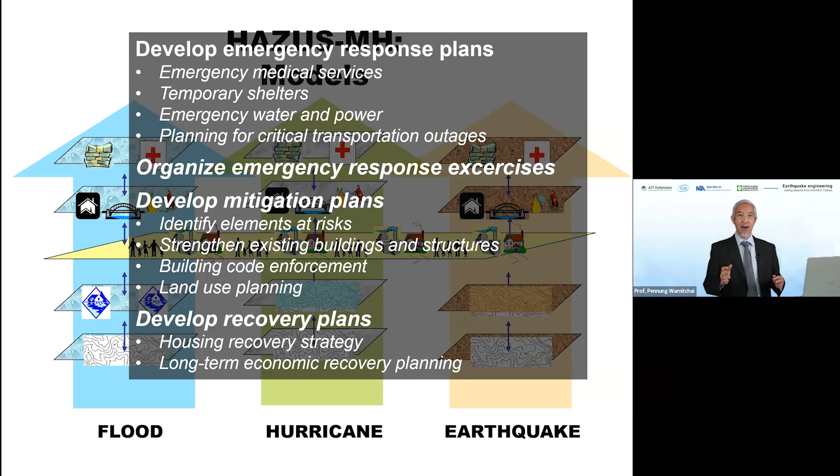I'm surprised that I can cover all this in a short time. Thank you very much. Okay, thank you.

Thank you very much, Professor Pennung, for your explanations and for presenting these photos and pictures, which is very interesting and easy for us to follow, although many of us are not engineers. We can see there are a lot of factors that we cannot control, but there is also a possibility that we can mitigate risk and avoid the risk. At the same time, we can also have data solutions or multi-hazard mapping solutions where we can plan in advance.

And at the same time, those of us who are in the insurance industry can see that with the mapping of hazard risk and disaster risk, we may also be inching into looking at the damage that would occur, and that may help the society and the economies of the local area and the countries. So I'm not sure whether we have any questions from the floor.

Is there any? Hello, professor. Could you please explain how many seismic magnitudes cause non-strengthened wooden frame houses to collapse, and at which magnitude a strengthened wooden frame will collapse?